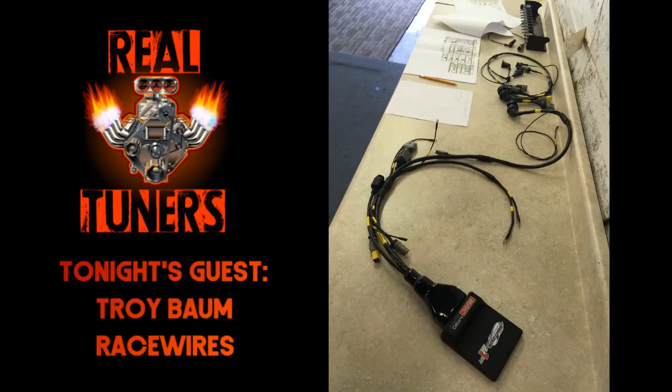I think it's you making the noise, somebody's banging on their keyboard in the background. Couldn't have been me, I had it muted - oh, he's got it lit up, the mute's not working then. I could tell because of before - fingers, each one of them pieces of sausage weighs three quarters of a pound, banging away on that keyboard, bang bang bang, I'm watching this thing light up. Hey now, we got people with their kids listening, be polite, I'm just teasing. Well, I'm giving you a time for the sausage comment. Yeah I'm teasing, the guy's 7 feet tall, give him a break man, he's Andre the Giant. Troy's taller than I am - damn, 7'1", yeah Troy's got me by a couple inches, he's just skinnier than me. Hilarious, bunch of Sasquatches. And he's nowhere near as good looking. See, here he goes with that shit again - this is how it all starts, this is exactly what I'm talking about, it's going straight downhill from here.

High current you want to keep out, those pins aren't rated for much, maybe not even 10 amps if that. So you want to limit it to that, which you'll know after you do your initial layout. Once you do your pre-planning, you'll know what you need at that point, and then it's homework time. That's a lot of the time, pre-planning, rounding up all the parts, that's hours right there, before you even pick up one wire.

When you run high current stuff through the firewall, do you have a brand preference for the grommets you use? Your stuff looks killer, so I'm assuming there's something you reach for when you go for that.

Yeah, I'm like a grommet junkie, I've used so much stuff, I've bought stuff I don't even use just to try it. What are they, they're a real nice big grommet, I don't even know the brand, I buy them from a hot rod shop out in California in bulk, but they're similar to a Painless grommet, I think it's Painless. Let me look here, the brand Painless. James McEwen, are you on from Texas? One of the guys from Painless goes to my classes often and listens a lot. James McEwen, call me on the phone, dude, if you are. Yeah, I think it's one of their grommets, I'm gonna look it up here.

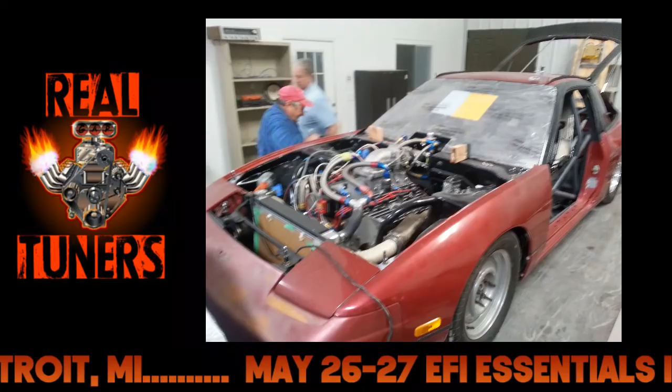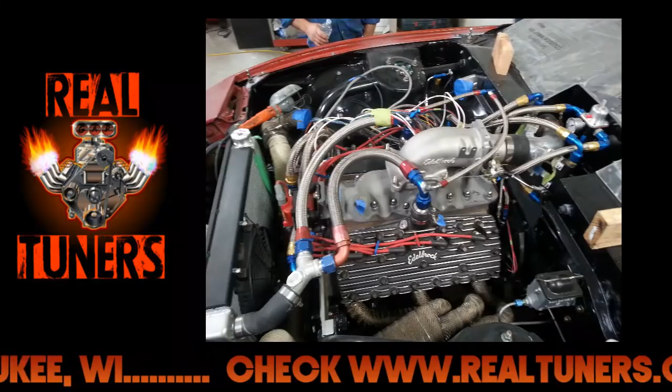Yeah, it's a bigger painless grommet with the center punched out, but it's flexible, so you can get V-Net. If you're RacePak and you have to get your V-Net cable, you could fit your V-Net cable along with other wires. But then the hole closes, it's not a huge gaping hole in your firewall.

Right. Lord knows we don't want no gapers. So yeah, where'd Bewley go? I know he's hanging around. I'm not even gonna dignify that with a response. Gaping. What are you guys talking about?

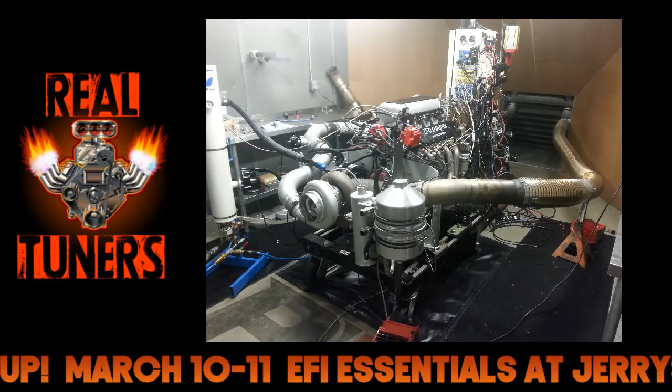Tyler Titus, sorry, I catch his post. Delphi has some lower pin count, more budget-oriented bulkhead type connectors. Delphi HES, they are compatible with Deutsch DTP stuff too. Oh, cool, good advice, hopefully.

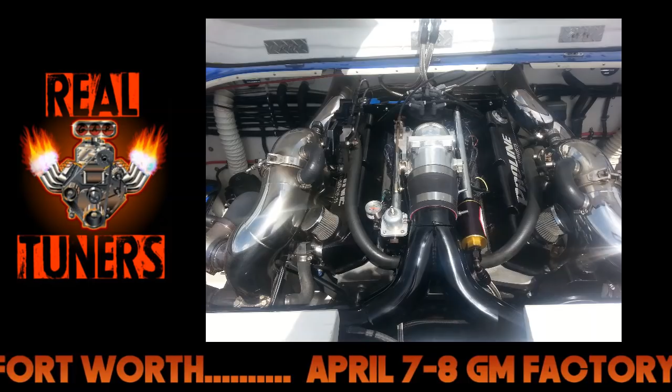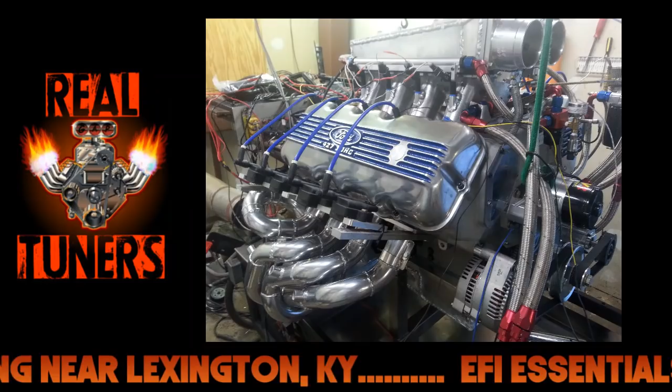Yeah, it is. Hey, whole room of wiring pros in here. When you guys, when somebody's welding on a car, what are precautions for them to take? I disconnect the battery and I disconnect the ECU because I have seen one that got fried from welding on the car. I've seen 4 or 5 in the last probably 10 years that have gotten clearly damaged from welding.

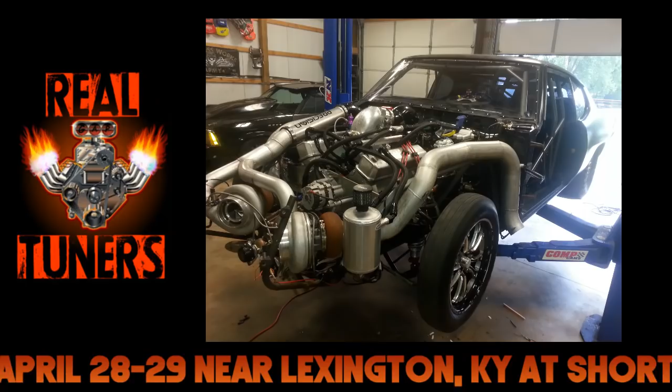The traces get fried on them, but yeah, that's disconnect the ECU completely, disconnect the power and the ground at the battery. That allows no current to flow through from one point to another, anything in the electronics. And honestly, if you want to pull the PCM out of the car, most ECUs recommend that you don't have it physically touching the chassis in any way to begin with. So they want some kind of rubber grommet in between the box and the car, so you don't get a huge current travel through.

As long as you disconnect it, right, you don't want to have a bunch of current travel through the case of the ECU either. That can do damage, that's like any grounds that are attached to the chassis. Basically, we disconnect all and we pull all sensitive electronics from the car completely. Yeah, we don't even just unplug it, we remove it completely.

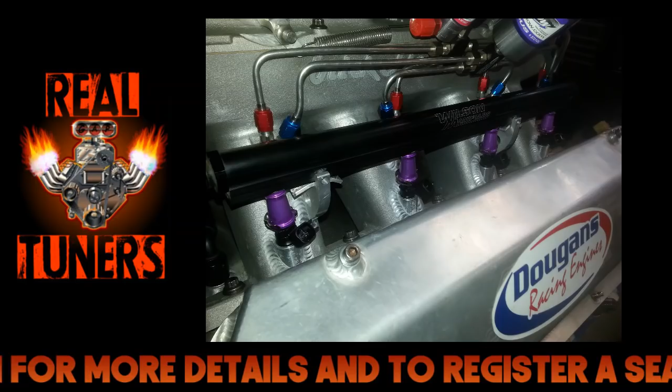No matter what, it's always a good idea to have it easily removed before welding. Yeah, electronics, not good, a lot of weird stuff goes on.

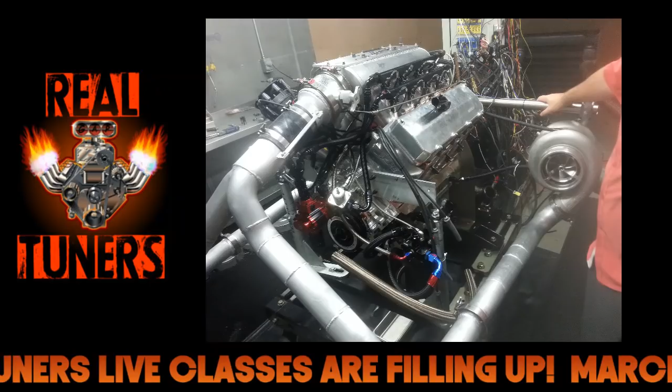I mean, I remember seeing guys weld on a car, and he had the clamp somewhere else, but I remember like a brake line catching on fire at the other end of the car. Didn't even make sense. Why? I don't know, but just hilarious. Yeah, bad news.

So be careful. It's cool, I'm reading through some of the comments here. A lot of these guys, yeah, isn't that? I mean, you can see there's a lot going on there, people asking questions, trying to get the good one. Let's see, Ken White asked about wiring, brand, and place to purchase. So we'll rewind it about 10 minutes, Kenny talked all about that.

You talked about going through the firewall, I think you caught up on that one. Anybody else here? I saw one about sensors, what sensors we recommend. It's probably a lot of the same stuff you would recommend, like you have your basic engine stuff, air temp, TPS, water, oil, fuel pressure.

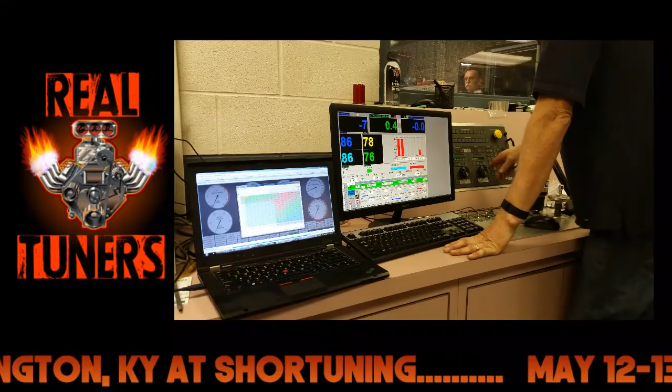Yeah, I'd like to see temp and pressure on any fluid, anything that's got a fluid reservoir for sure, that you can get to. Yeah, your wastegate, I haven't ever done wastegate position sensors on anything. I have not, Scott. Yeah, I have not. I haven't either. I see people doing that every now. I saw Tecklenburg had done it a few times, but I have not, some of that used them.

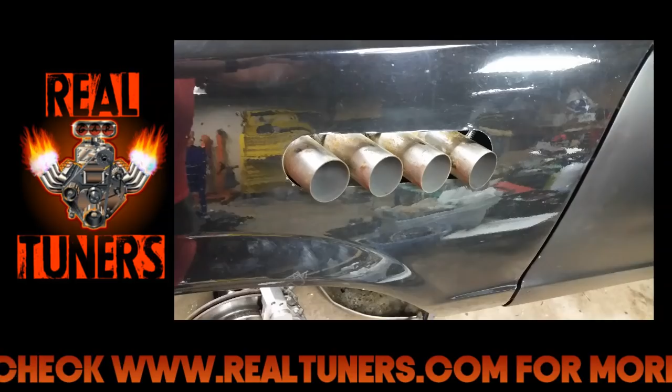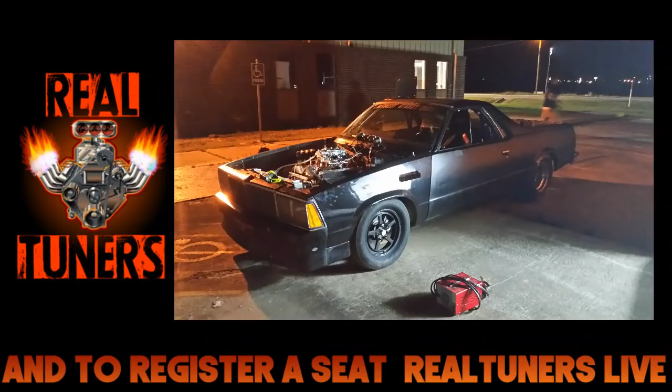Fancy Honda stuff there. Well, yeah, I hear you, but I mean, I know that you can use a Ford EGR valve sensor, position sensor. It's literally just like a push in and out, straight line, linear thing. And I've seen somebody make a mod for that recently that looked like it would be easy to do, and I think it would be handy to have. But usually guys go for turbocharger speed before they go for wastegate position if we're adding stuff. You know how that goes? Yeah, I'd much rather have the turbo speed, shaft speed. But anywho, that's what I run into.

Why is that? I'm just asking for everybody. I don't know, I think it's a little more useful to have. Like, if most turbo manufacturers, you can tell if you're overspeeding it, you can get reports on that, you can kind of get an idea. You know, Bewley, you want to talk about turbo shaft speed at all? Any thoughts on that?

It's a reliability thing and an efficiency thing, because most of these guys, most of the time, you can tell based on shaft speed and fuel flow how efficient the compressors are working. Anytime you're running a unit that has a map made for it, you can go back to the compressor map and see what you've got going on there.

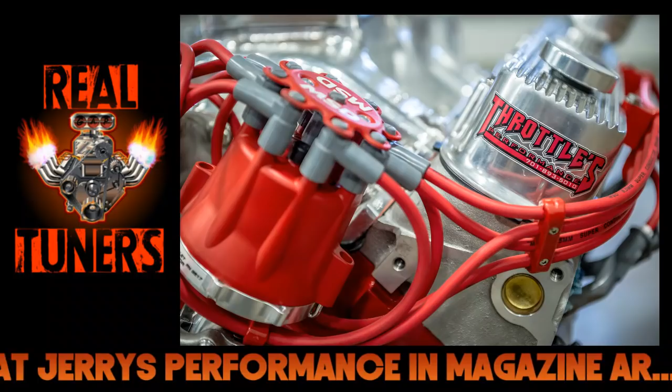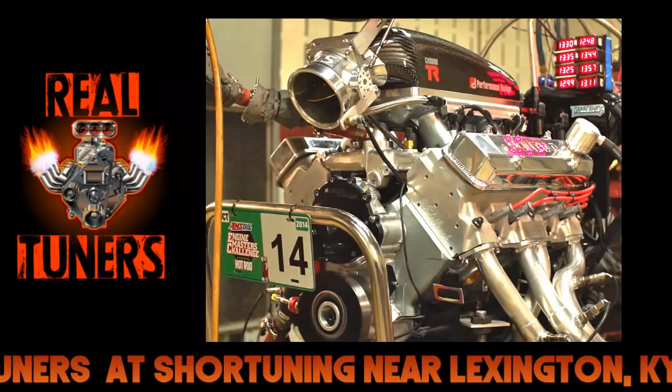You can see if there's changes you can make to maximize everything. You can tell if you're not getting the mass flow out of the compressor that you think you ought to based on shaft speeds. With enough data, you can tell if the cam is right for the motor based on shaft speeds, pressures, and fuel consumption. There's a lot you can tell if you go so far as to have shaft speed data - it's a real handy tool, and if you're in competition it's pretty useful. Shaft speed will tell you if you need to open the gate and slow the turbo down a little.

Is there any other useful sensors that you guys have with all the tuning experience?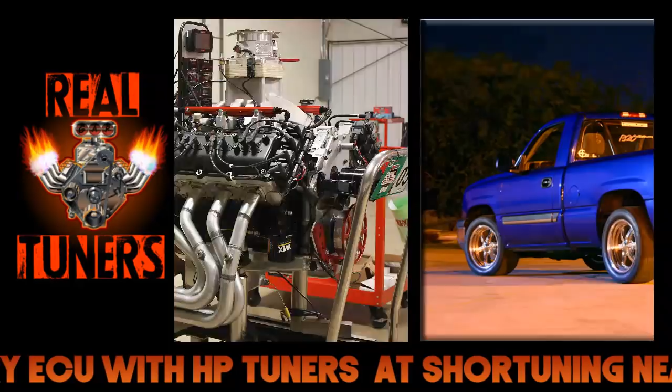The key to those sensors is that you need to set up a custom voltage instead of the standard voltage. The standard voltage reads 0 volts at the lowest point and 10 volts at the highest point. If you're doing it for power management, for wheelie management, when it gets up to the top and goes out of bounds, it resets to default, which is 0. So now all of a sudden your 0 is all the way up in the air, which means it puts back in all the timing you were taking out based on that voltage going up. So you basically flip the voltages so it's 10 volts at the bottom and 0 volts when it's up in the air. That way when it reaches its top and defaults back to 0 volts, it's not pulling out timing - it stays at the maximum amount.

That makes sense. They're what, 12 inch? Like I said, if you use it the other way - I think they make one that's really, really fine, and one that's 12 inches or something like that. Then it's just finding a good spot on the car to put it. I tell people put it right on the K member, just so it's not going to smash if you come down on it too hard. If you mount a little bracket on the K member on your car, and if you don't have a K member, then mount it on some other bar that goes across.

Yeah, I've seen them installed all the way in the front. Generally you can mount them up on the front. If they're power wheeling a lot or they get out of range, I've seen some guys put them in the passenger floor area, frame rail, anywhere that's solid will work. It doesn't matter what the very nose of your car is doing, as long as you have a consistent reference. If you know the front of your nose comes up 12 inches and at the driver's seat that equates to only 4, then put it in the driver's seat and you've got more range to play with.

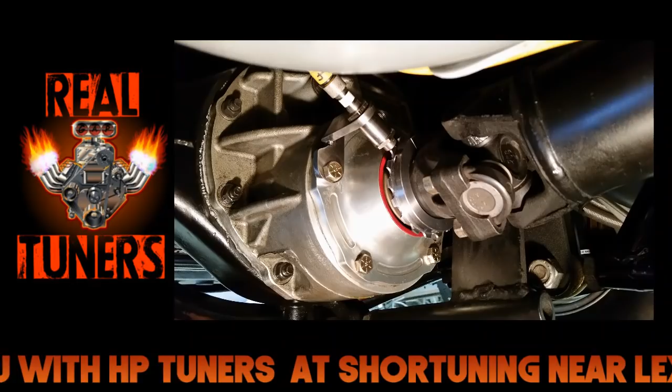Yeah, those switches are just your one risk, is that you have a hot lead that could potentially be something that creates sparks or heat or a fire. The downside though is I've actually seen huge noise problems from alternators when they were tied to the upstream side of the cutoff switch that screwed with all the rest of the electronics.

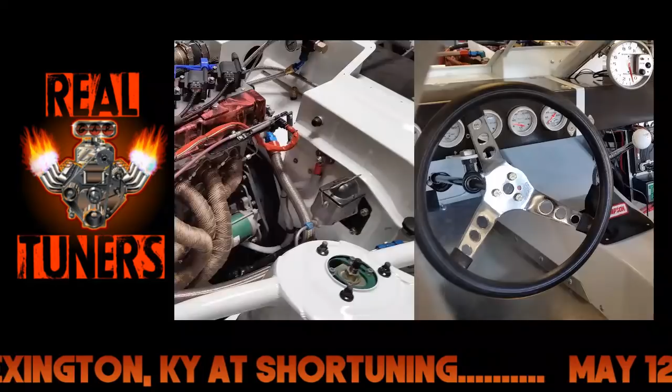That's why you hook it up to that relay piece, it goes with the switch. It cuts off when the switch cuts off. Yeah, and I see other guys doing it to the starter alternator lug directly. Yeah, I never do it to the starter lug. You see guys doing that really? It's noisy going that way if you got your electronics pulling off that same lead.

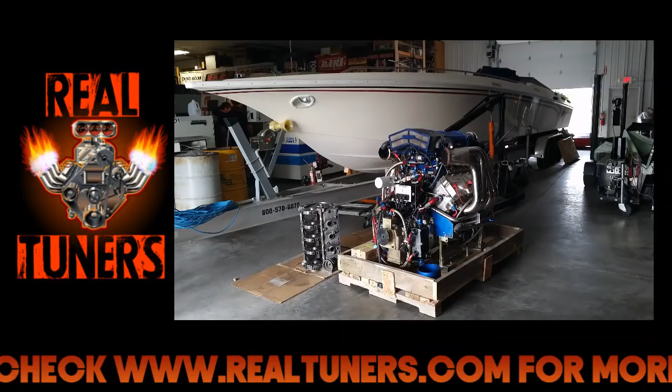But it's not off that same run of the battery. I don't like alternators for the noise they put out, so I like to see them go into the battery, that's kind of my personal thing. But alternator definitely straight to the battery. If you need a cutoff, it can be either one of those double pole switches that has its break for the alternator, or that relay.

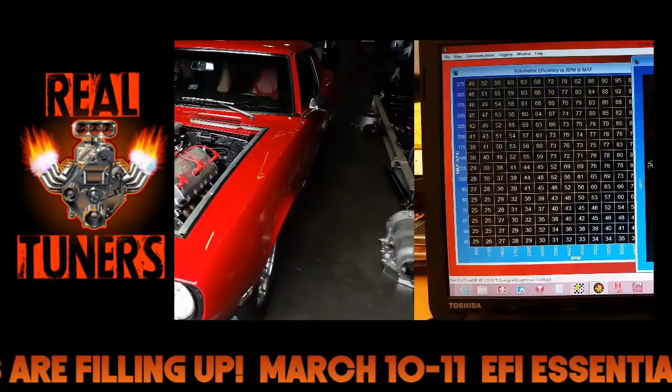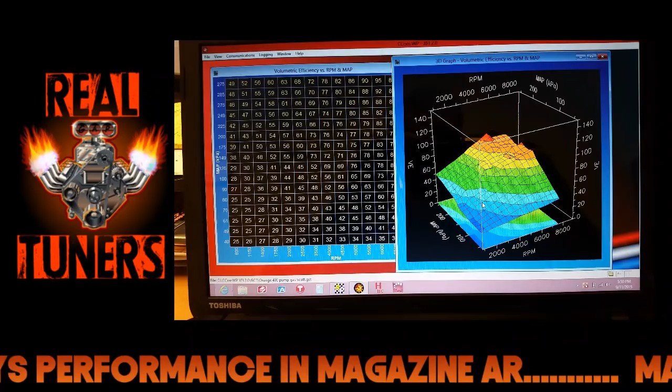Typically cars that fast, the door slammers, what trim are they in? NHRA Pro Mod trim? Doubt it, because they're boost limited. PDRA or whoever else sanctions that, the weights for those cars and classes. But anyway, we're just curious to know what trim that car was in. If anybody knows, let us know.

I want to say they run that car in Pro Boost trim. What is it, PDRA Pro Boost? Yeah, then that's legit if they're running at any class trim, really. Don't quote me on that and flame me on the internet tomorrow for saying it, but somebody certainly will. I think I've seen that thrown around about that car before, that it's run in Pro Boost. I don't know if that is a bankable fact or not.

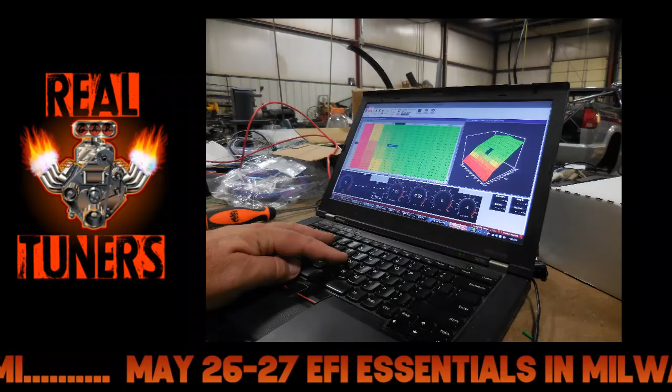What else? Anybody else got questions? We still got a half hour to go, man. Otherwise Trey's going to get bored and just leave us.

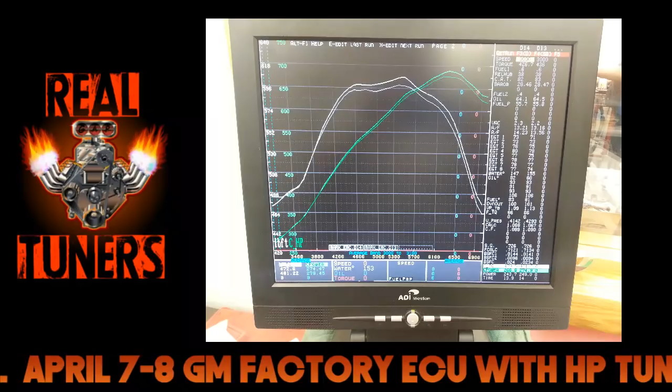Sure, check valve, it's kind of funny. What made me think of this - my C10 has air ride on it, and I noticed the other night when I'd air the thing up and hit the valves, my dome light would blink when I'd release the button. So I don't know, yeah, it's finding that current path through there. That's what that is. Yep, the weirdest thing.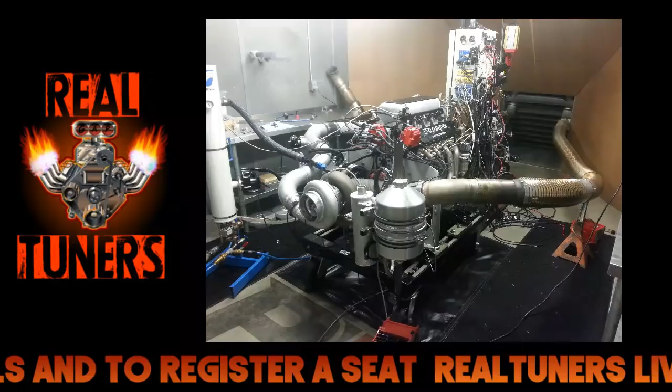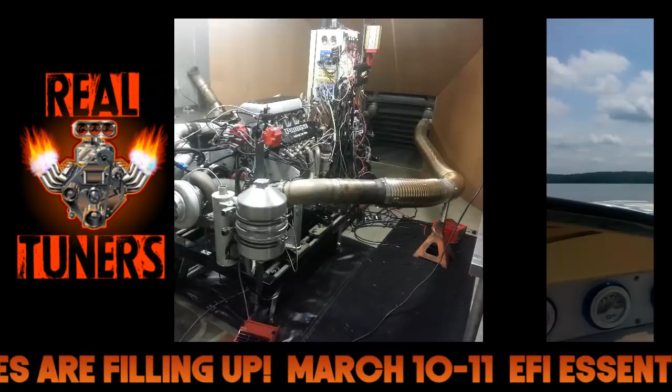Freaking electricity, man, it's weird stuff. Yeah, it does crazy crap. I don't understand it hardly any at all, so you guys are one up on me with that stuff. Well, these guys deal with it every day. Yeah, you guys have a great way of explaining it. I can't explain anything, I just make it look pretty. Yeah, the technical side of things is a downfall. A lot of it's common sense stuff - when you're wiring up a car, there's do's and don'ts, you know.

Hey, here's one - we talked a little bit about this in class this weekend, Scott. Ground triggering with a ground versus triggering with 12 volt positive - does Troy have any preferences on that? I prefer triggering with a ground, not really, I'll do whatever is needed, whatever's called for, right? Yeah, he's the guy that builds the system to spec. Yep, whatever it tells you to do.

Different ECUs - a Big Stuff 3 wants to power that fuel pump relay, but everybody else wants to do it ground 12 volt, and Holley can do either way. I personally prefer to give things 12 volts to power them up, because if a wire fails, it can't turn on. Basically, if you don't give it 12 volts, it doesn't turn on. Yeah, if a wire melts or breaks and shorts out, now suddenly it's on. So I like to give something 12 volts to turn it on, and give it a constant ground. That way you have to force it on, it can't get forced on by a short.

It's six of one, half a dozen the other, right? It's if you give it the voltage - what I don't like is I've had problems where a bad connector was causing noise, and that affecting the 12 volt control got through into the ECU and started screwing with it, right? And in a car, sure, that wasn't the 12 volts that was the problem, that was the bad connection, right? But it made the ECU more susceptible to external interference, I guess is what I was getting at. It was causing ignition misfire and hurting parts.

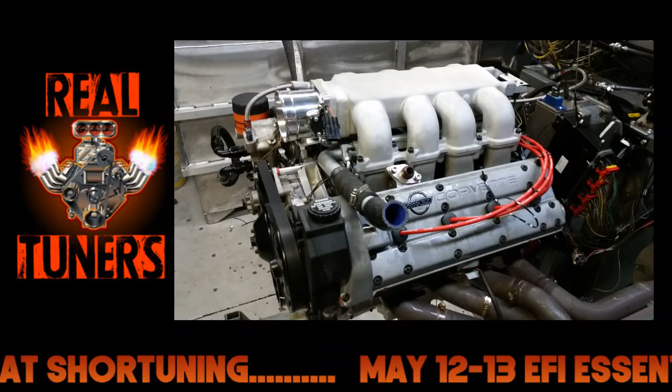Don't let Troy play bartender. Here we go. You can start on him all you want now. It's like 9:50, so it's 10, it's almost 11 o'clock on the East Coast. What's your preferred brand of Rufinol? Jack Daniels - he doesn't understand the concept of ratios, he's like dyslexic, if it's supposed to be 3 parts Coke, 1 part Jack, he flips it. Here's one - you want to drink soda?

I finished that Templeton Rye tonight, finally. It's taken me like 6 episodes to go through this, just sipping on this rye whiskey. It's actually pretty good, I'm gonna get more of it. Is that code for you had 3 margaritas? No, it's legit, I need to get video going so I can show people what I've been drinking.

Dude, you should have seen the garbage he was drinking this weekend, John. What was he drinking? There is no telling. I was drinking Evian water all weekend and taking Zicam because I knew I was going to get sick. My girlfriend had like a 102 fever for a week before I came out here, and I felt myself getting it on the plane. So I went and bought $40 worth of Zicam.

I have the solution for that. Smirnoff Ice, you do 2 shot glasses full of Jack Daniels, followed by 2 shot glasses full of NyQuil. Then you take a nap, and you get up and teach a class for 16 hours nonstop, a presentation and a slideshow, making sure both projectors are working and the wireless is good. Oh God, the classes, man, they're a lot of work. But those 2 shots of Jack with the 2 shots of NyQuil cure it, so you don't have to worry, because when you finally wake up, you will be fine.

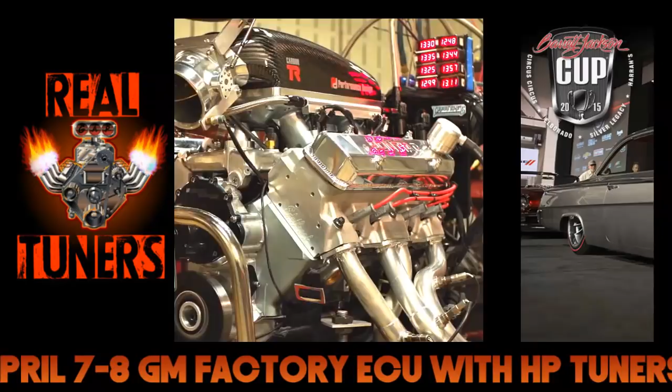Just don't try to drink those in one of those Dick's Last Resort restaurants where they make fun of everything, the sarcastic eating, don't try to do that there. We had somebody who went with us that decided to get some foo-foo mango drink, and they heckled him to death. Listen, you go to a Dick's Last Resort, you just don't need to breathe wrong in that place. Otherwise you get a dunce hat put on your head, and it's on. Well, they give a hat to everybody at the table whenever you eat.

Okay, hold on, back to a real question here since we got 5 minutes. It's my guy InDebt745 again, I like your username. He's got relocated coils on an LS engine with 25 to 36 inch fire coil wires, too long. He's asking if that's too long, opinion on current loss. I think you're fine, I've made big power on surprisingly long wires. And remember, guys used to do it with distributors.

Yeah, not a problem. I don't think it's a problem because the distributor itself has long wires, requires long wires, and a second gap to arc, which is way worse than a long run of wire. So distributors often don't have as much juice as this. By the time you get every shot, every coil, it's not really that big of a shot, you're going to be fine on electricity.

Here's one, Alex Lund. When wires off a sensor trigger are twisted together, how does that help smooth the signal? I don't think it does smooth the signal, it just reduces the potential for interference and crosstalk. So when you twist the wires together, and I see a lot of people do that for aesthetic reasons, just to run like 2 or 3 wires, is there any downside to that?

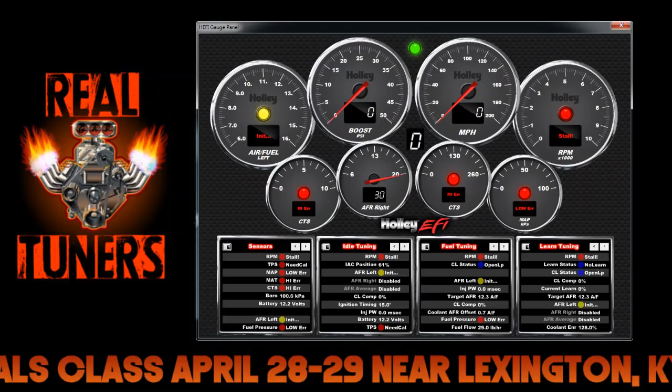And it looks trick. It looks like candy cane. Yeah, they're beautiful. Oh, you're supposed to use different color wires on each wire?

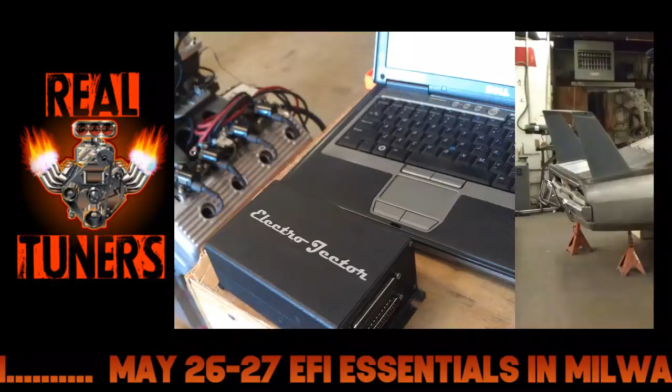Everything's red, everything's red. I see one here you guys could probably answer pretty good - the difference between the coils. Did you see that one? The IGN 1A versus the LQ9, the different style. I know you guys have a lot of experience. Delgado's probably really, really good at that because he's got some actual real world testing on some of those things.

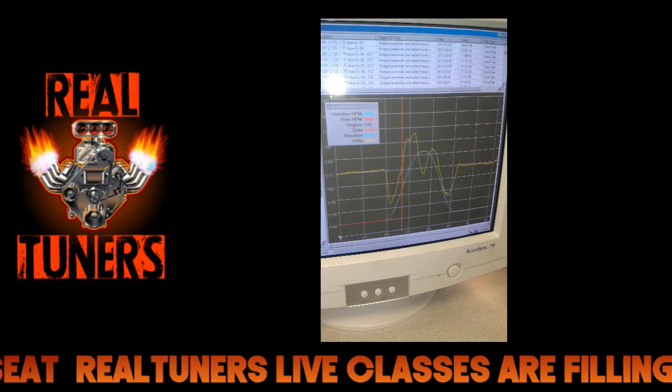A little bit. And then he was going off on the LQ9 coils, saying they're complete junk, which I disagree with highly. Those are the best OEM coils you can get. One of them's the best OEM coil pack with a built-in transistor for OEM stuff, and at the OEM level that you can go get at a parts store. And then the other one, the IGN 1A.

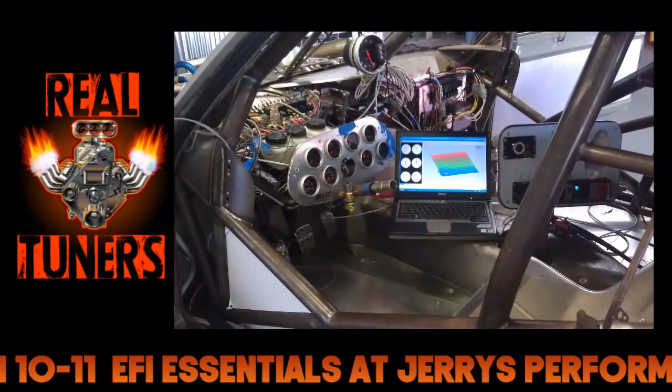The challenge is there's 2 different truck coils, and one of the truck coils is complete junk. No, there's actually more than that - there's at least 4 different of those 585 style coils that I've run into. If I remember right, it's the ones with the heat sink on have the...

And here's my argument. I think people think they're junk because some of them discharge at 9 milliseconds, some discharge at 5 milliseconds. Chris said there's some that go at 11 - not the heat sink ones. The heat sink ones are the ones without the big heat sink on them that go for a lot longer.

Well, the bottom line is some of them don't charge anymore past 4 or 5, but the reason they go off earlier is because of the way they're wound, so they're already charged. You just got to adhere to those limits and know what you've got, and then you'll still be able to make 5 or 6 horse per cubic inch with those coils.

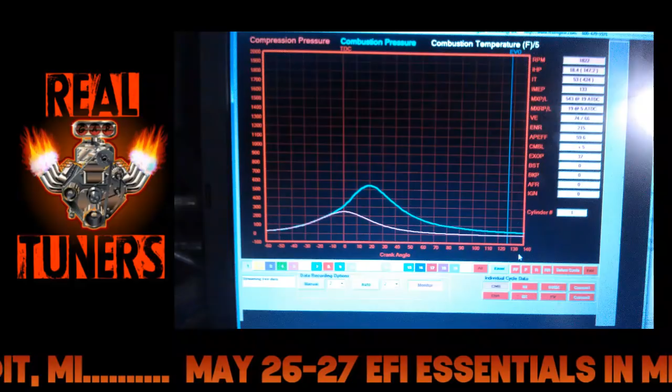There's a lot of import guys making big specific output, and it's not total horsepower, it's horsepower divided by displacement, because that tells you a rough idea on cylinder pressure. Again, that's also affected by dynamic compression and a whole bunch of other factors, but a good rough rule of thumb is power per cubic inch.

I've had the IGN 1As up at 10.5 horsepower per cubic inch. I know guys that have taken them another point or 2 higher than that. But the physical differences - he was asking what the differences were - physically the IGN 1As have 3 separate grounds instead of 2, which is a huge case for ground noise coupling that I talk about in the webinars and at the classes.

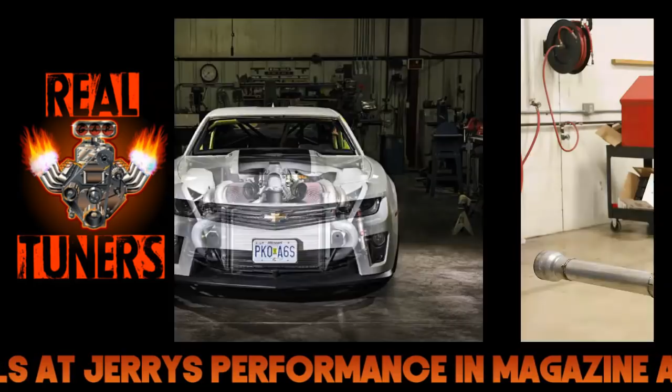It shows you the manufacturer of those coils, which is Marshall Electric - the original ones, not the clones. Marshall Electric made them for Mercury Marine, and they first showed up on the Mercury 1650s and 1250 horsepower V-drive style race and big offshore boat engines.

But anyway, the 3 grounds: one for the power transistor, and then 2 for various high current drains - one's the ignition and the other is the trigger. So one's a reference for the trigger, one's a zero reference. They want one to go to your ECU ground, one to go to the cylinder head that it's sparking on, and another one just to go to a dirty style chassis ground or something like that. But anyway, that's the main difference.

They both have power transistors on board. LS coils have a safety mode which can actually be kind of unsafe, as they'll discharge themselves automatically if they're charged or dwelled too long. The IGN 1As will just melt themselves. So it's six and a half dozen - IGNs, I've seen people push them to 9 or 10 and they start to... there's more to it, but we've talked about that in other episodes. That's the main difference right there.

The IGN is in general considered the hotter of the coils, which tends to give you the most spark output. Yeah, they'll draw up to 20 amps on a 12 volt, 13.5 volt system - 20 amps per spark event if you have dwelled all the way up. Which means you've got to have like a 10 gauge main wire split to like a 12 gauge to each coil, or 14s I think. That's 14, what you're getting, yeah. 14s. But yeah, and they take some charge time.

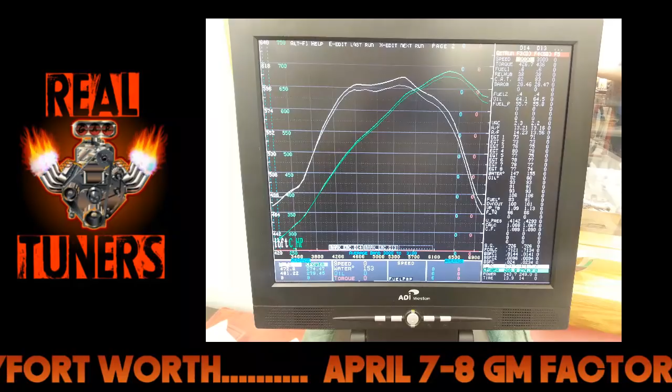That's getting up there, but anyway, common stuff. There you go. Which we got guys checking in with 1100 rear wheel horsepower on a 6.0 LS running the D585 coils. So that's making some steam - that's going to be 12... just made 1500 on some old used 585s off my car the other day. Nice, there you go.

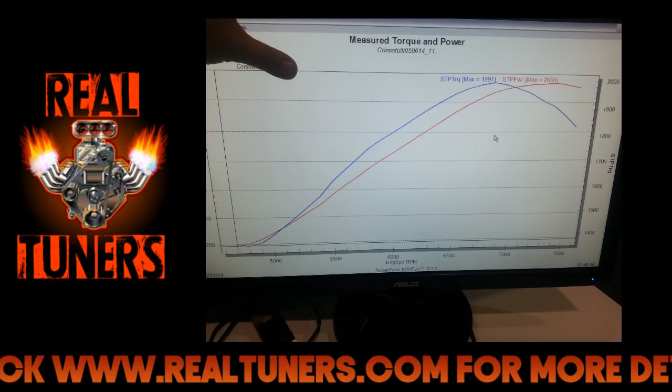What's the most horsepower you've seen out of the coils? The most I've personally wired up and been in charge of on the IGN 1A coils, specific output, was a 120 cubic inch 4-cylinder dragster motor, Mitsubishi 4G63 based, that made 1,338 horsepower on a DTS engine dyno at the flywheel. That's roughly 10.5 horsepower per cubic inch. Overall, I think we've seen some of the Motec and Tecklenburg based Pro Mod cars - if I'm not mistaken, some of those guys are making maybe 4,300 horsepower at the flywheel on IGN 1As. Somebody correct me if I'm wrong. I've got a buddy who's been making 430s with LS7, LS3 coils.

Well, it's past our time, we've got to get wrapping it up here, man. Troy, you've got to get to work early in the morning, I'm guessing. It's late your time. Yeah, I usually work till 2, and then I'm back up at 7. Oh, gotcha, damn. So are you at the shop right now?

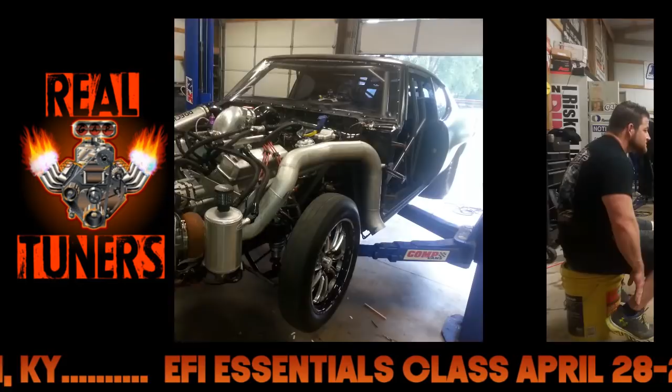I am, yeah, I'm gathering some stuff up. Tomorrow I'm traveling a little bit. I'm headed to 417 Motorsports tomorrow, going to Springfield, Missouri to work with a customer. I'm going to drop in on Blake Hughes' shop. Oh, that's like a 5-hour drive. Amazing work, they do great work down there. They're fun too, they're busy as hell, but good stuff.

I'll give you a $100 bill to take Blake a box of peanuts for me. I will - you didn't even give me $100. I'll take him a box of peanuts. Take him a box of peanuts and tell him it's from me.

Stick around, talk to me offline. All right, well Troy, thanks for coming out tonight. Stick around, stay online with the guys here on the chat while I run the little outro stuff, and we'll talk for a couple minutes before we let you go. But we'll say goodbye to everybody, and thanks everybody for asking questions. Very cool, yeah, absolutely, thank you for having me on.

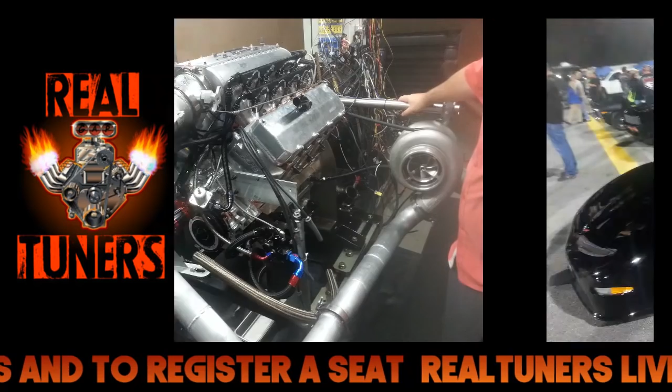Yeah, well, and I told Troy this, and I'll tell everybody else - we just went ahead and added him to our behind the scenes chat. So maybe if he has time and he's in the shop on other Wednesday nights, he'll have a chance to chime in and help us out, because we need kind of a full-time wiring guy anyway. But anyway, once again, thanks. I just make things look pretty. You guys know all the tech stuff. All of us know just enough to make it run. To make your life miserable. Just as long as we can blame the wiring guy, we're good to go. That's all right, I have strong shoulders.

Right on, well thanks again, Troy. I'm going to do the outro. I ran a 16 gauge to the starter. We'll talk to you guys soon. Thanks again, guys.